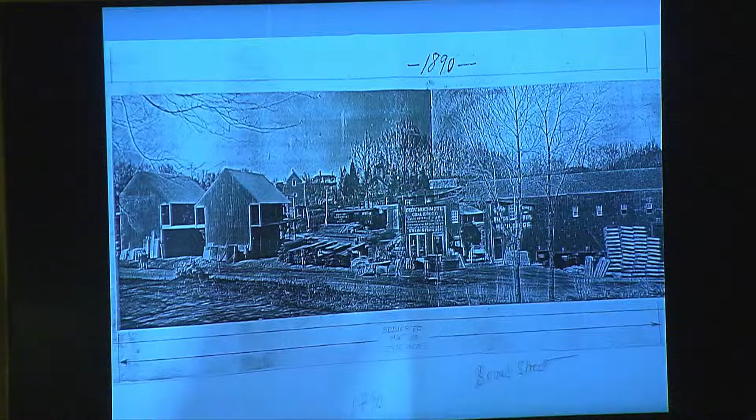Real quick, we're just going to do a quick project recap of how we got to this point - some project schedules, what's been done on the site so far to prepare for the build, architectural design, and some improvements that we have in the new build that we don't have in our old building.

So real quick, we started this process in June of 2014. We did a quick needs assessment study on our current building to see if it was feasible to build on our existing site, or do any kind of renovation to the existing building. So we hired LeMay and Wilcox to do the study.

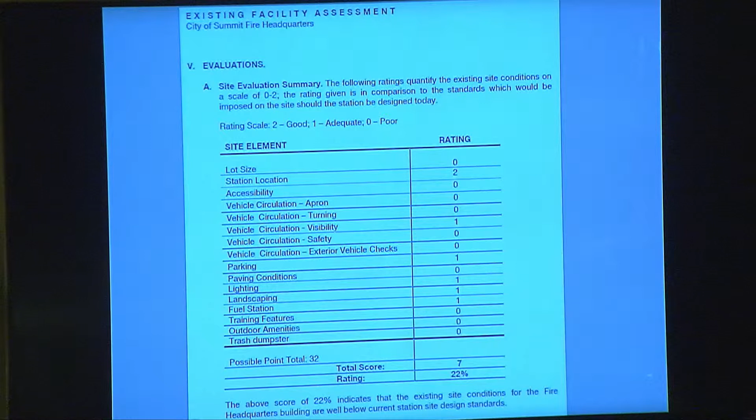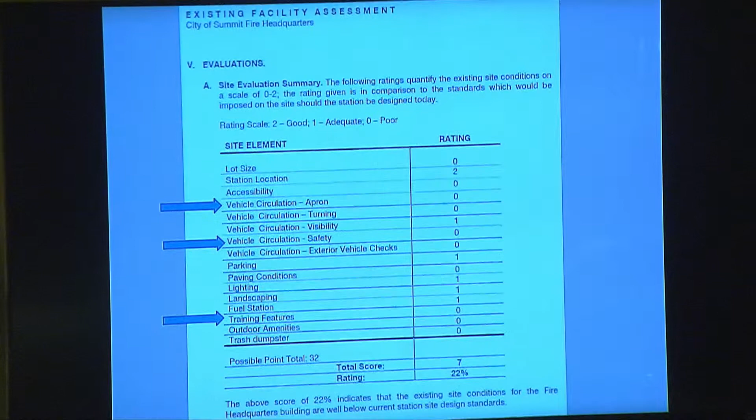We did an evaluation of the site itself. We looked at vehicle circulation around the firehouse, the apron, visibility, safety. We looked at training features within the building, and also the building elements themselves, and life safety code within the current building. We also looked at gender equality of the building, how it fits different genders going forward and for the public entering our building. We looked at emergency response paths in and around the building. We looked at apparatus bays, how they fit our current apparatus and operations. For decontamination, which is a big part of why one of our firehouses is deficient. And also the mechanics of the building - plumbing, electrical, and all the data systems.

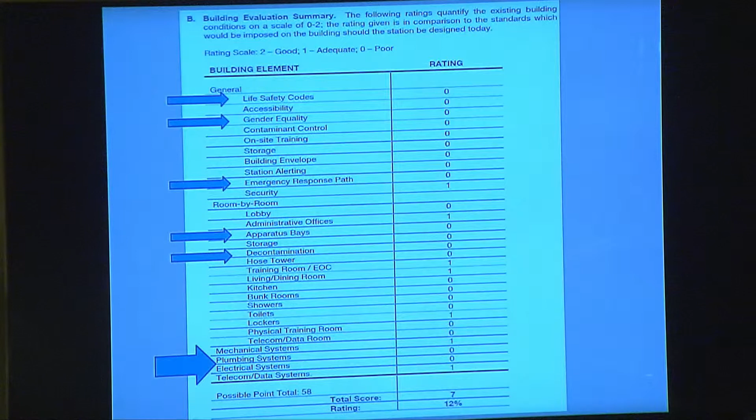Very quickly we learned that the building is old, the site can't support a new building, and our firehouse needs to get moved off-site.

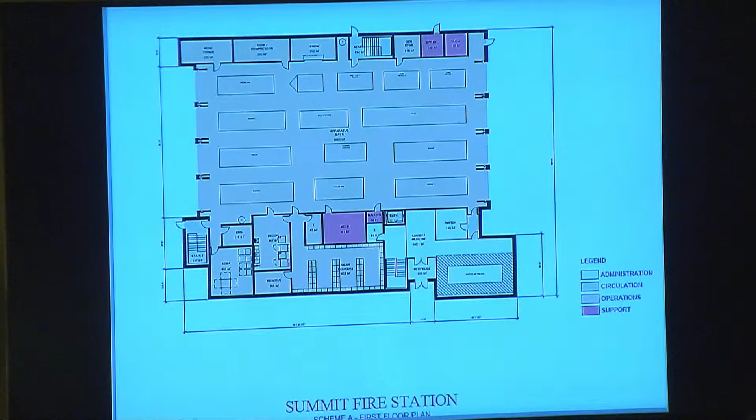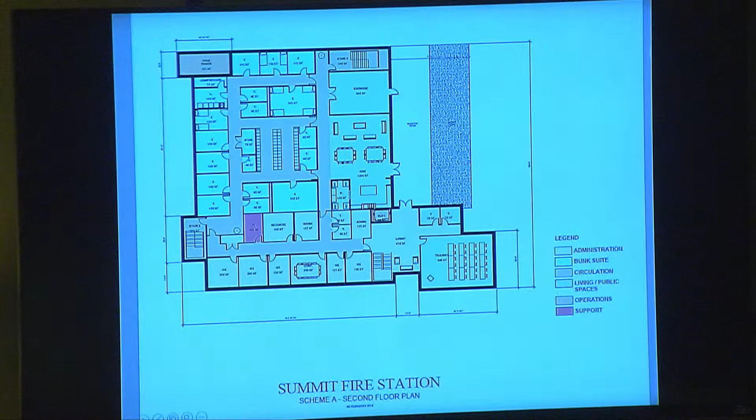That led to a feasibility study in 2017. We looked at our current operations and what square footage we need to operate. We did a basic layout of things like our decon room, turnout gear room, lack of elevators, EMS storage. We also looked at admin needs - what we need to operate currently and into the future. We put all these boxes together, and it came up with the total square footage of what the fire department needs to operate today and moving into the future. So that's how we got the size of the building based on those factors.

Then we looked at a couple of different sites in Summit, and the site we proposed to build on was the Broad Street East lot. Out of all the sites we looked at, this best fit our needs square footage-wise and also movability-wise in and out of traffic compared to the other two sites we looked at.

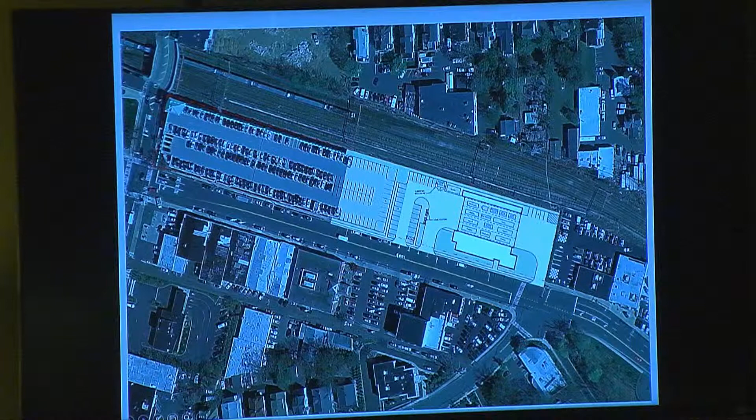That led us to, and as Council knows, in the beginning of the year, we contracted LeMay and Wilcox, the architectural firm. We've been working with them since January, and we were authorized to go to the first two steps, which is design development, the step we're currently in now. Right now we're just about to finish that.

After we go in front of the planning board in late June, we'll move on to the construction documentation phase. During the design development phase, we started some site preparation work. We took the footprint of our proposed building and did some boring samples on the site to see what the soil composition was, and whether it can support a structure this size.

Based on those findings, as Council knows from last meeting, we authorized a second part of environmental work, looking more at the historical fills on this site. They'll be starting this Friday on the site. It'll probably take about one day, and they're going to do maybe 15 to 20 borings on the site to see what the ground is made up of and try to get some historical fill out of there.

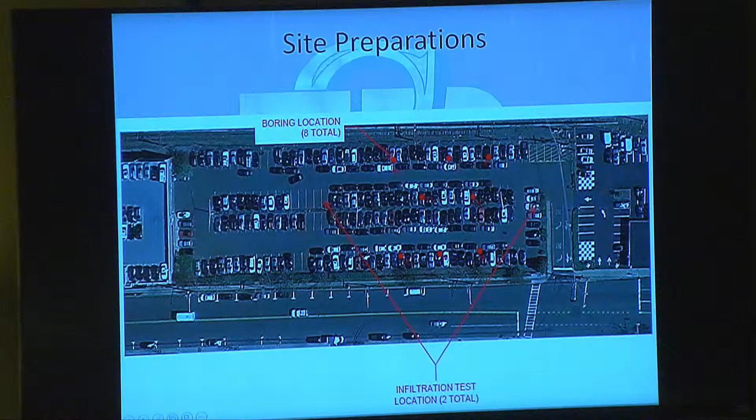So this is currently what we're looking at. Like I said, our project team spent a lot of time on the design. This is the design we're probably going to present to the planning board. There are a lot of features in here.

This is the mezzanine. One of the goals of this new build was to incorporate a lot of training features into this firehouse. We spent a lot of time going off-site around the county, the state, and the country doing trainings. So one of our goals is to incorporate, just by the design of the building, a lot of open spaces we can take advantage of. This is going to have a lot of opportunity to do training right in our building.

One of the features we're looking at too is a little mini Summit streetscape of what downtown Summit looks like, and have firemen actually do a lot of training right in these rooms. We'll have some movable partitions for different rescue scenarios.

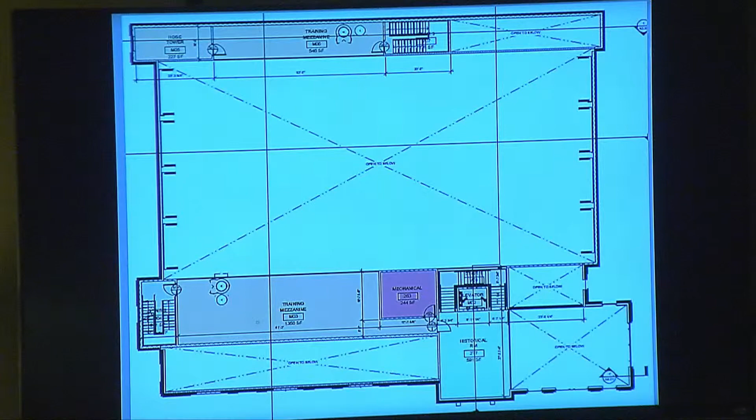Also incorporated into the second floor is our EOC and training room. This room is going to have a lot of state-of-the-art technology, a lot of training, and a lot of EOC functions, which are more web-based now. So we're looking to do a lot of interactive training in that room.

We also have our typical admin areas in here, our day room, and some outside training props. This area is part of the bays. Our program requirements didn't really dictate us to build anything bigger, so this is just an open space on the third floor. We're going to have some outside training props incorporated into this area, and we'll have our dormitories and exercise room here as well. They also have a pole hole in this area.

Sorry, what? We also have a what? A pole hole for fire. It'll be on the third floor. Oh, you have a pole for the firemen to get down. Got it, have to have a pole. Yeah, I know you do. Exactly, my son always wanted one from his bedroom to the kitchen.

One of the things we did differently in this build out was incorporating some space for the EOC. We learned from past events in Summit that the EOC gets very crowded, and sometimes we're there for long durations, which involves people needing showers and similar needs. So we had some rooms set aside just to support the EOC functions in this area. We also had a room in the dormitory for the team that spends the night, a private room, so they can offset some overnight hours into the EOC.

So that's a function we kind of missed during the last couple of big storms in Summit. That was a need we really had to address.

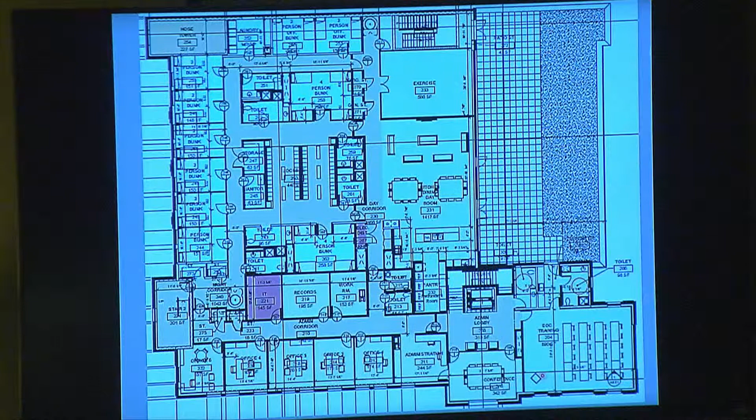Right now we're in the process of doing a lot of value engineering with our current layout. We're meeting with our project management team led by these gentlemen here today. We're meeting every week, spending about 2-3 hours every Monday going over all kinds of design concepts.

We've also been talking to the architects. One of the goals is to look at every square inch of this building and design it where we can save money. An example: the original design had open apparatus bays, wide open. We talked to the architects and learned quickly that if we put a column in the middle of the building, we can save about $500,000 in construction costs. So all those little things we're looking at.

So we're going room by room, looking at it, trying to value it as best we can, so that when we come out to bid, we hope to have a budget that's well within our capital line items.

We're also looking at some sustainable design features for this building. As we said in the past, we're not going to go for LEED certification, but there are a lot of initiatives we're going to incorporate—things like lighting, floor coverings that don't require a lot of maintenance like polished concrete, and a lot of natural light. You'll see later on, I have renderings of the outside with a lot of glass and natural light, so we don't have to put a lot of lights on. Those are the things we're looking to incorporate into this building.

There are a lot of other things we could do—one is to present this package. A lot of residents have been talking about solar panels and things of that nature. We didn't include this in the initial budget, but as we move forward, we can make decisions on whether we want to get into those types of energy savings.

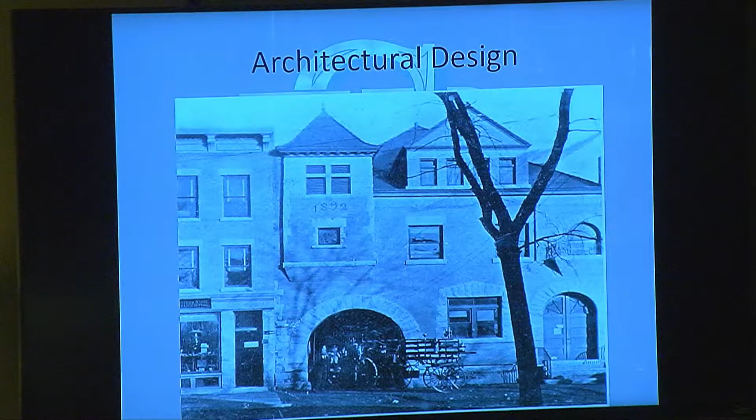We also wanted to look at some of our old historical buildings—this is our firehouse on Summit Avenue—and try to incorporate some of those design features into our current building.

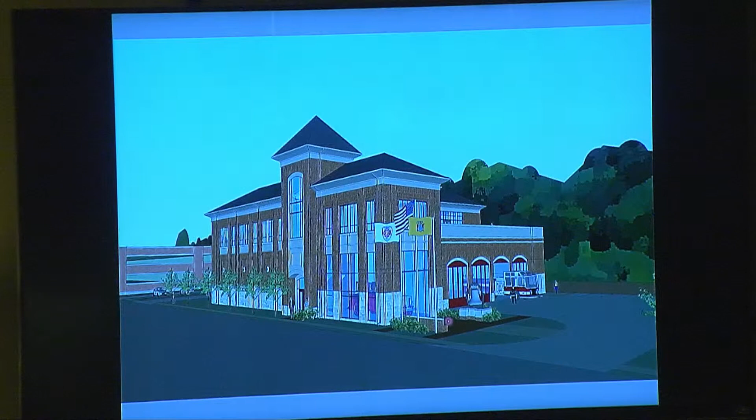Some architectural features that are around town are the big copings that go around the building. We're also going to move our bell monument that's currently at our old location onto the site, bringing it over to create a small dedication area for the few firefighters who passed in the line of duty, along with some of the memorials we have at our existing site.

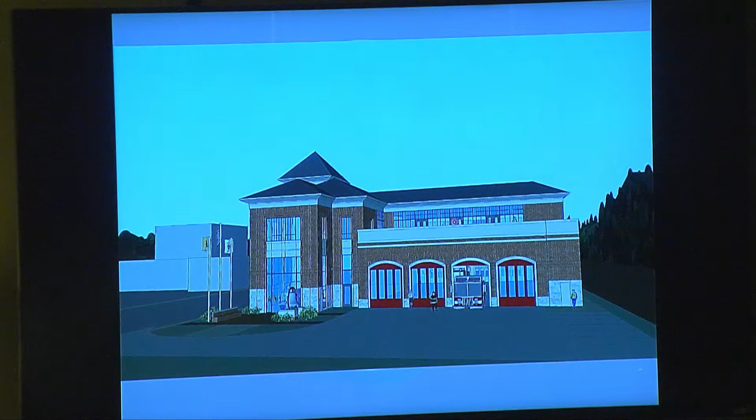This view is looking at the building if you're coming up Broad Street from Park Avenue. These are bifold doors—we learned they're a little more expensive but very cost effective, with very little maintenance, unlike a lot of our roll-up doors which require a lot of maintenance. So these are things we're looking at to help the building last longer and lessen our costs. Also notice a lot of the glass up top, again trying to get into that initiative of not having a lot of lights on, relying on natural lighting instead.

And this is the view if you're coming down Broad Street going towards Park Avenue—another view on one side of the building, with the doors here and the landscaping in front of it.

So next steps, we're just about to finish the first step of design development. We'll be doing construction documentation, which will take us probably to November, December-ish. Then the next step is bidding, so our timeline is hopefully to go to bidding by the beginning of 2020. Then we'll do some permitting, and if all goes according to plan, we'll look into construction sometime in late spring of 2020. That's the timeline we came up with when we first sat down with the architects, putting together projects, milestones, and goals we wanted to meet.

With that is the presentation. So if you have any questions at all, we're happy to answer.

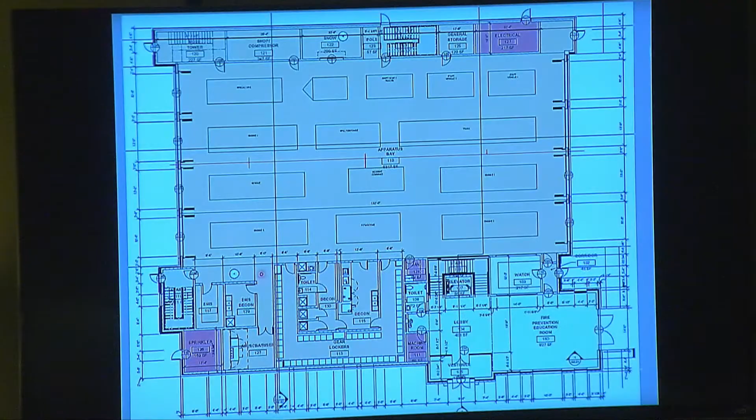Great, thank you. Okay, before you leave—I just want to say thank you. You've been working really hard on all this, gentlemen, and we appreciate it. I think long-term it's best for the city to have firefighters that are protected and want to work here. So thank you, and thank you for the support so far. Absolutely. Thank you very much, and that's it. Thanks, guys. Appreciate it.